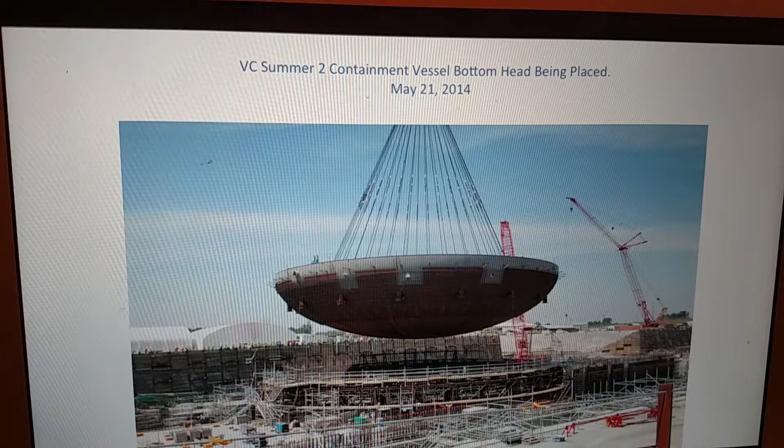Growth is occurring in the nuclear industry in the United States. 20 miles northwest of Columbia in Jenkinsville, South Carolina, the South Carolina Electric and Gas Corporation has begun construction on two AP1000 plants at the V.C. Summer site. South Carolina Electric and Gas applied for the combined operating construction license in March of 2008 and was granted approval in March of 2012. Construction began on Unit 2 with the first concrete pour in March of 2013. This was the first construction on a nuclear power plant in the United States in 30 years.

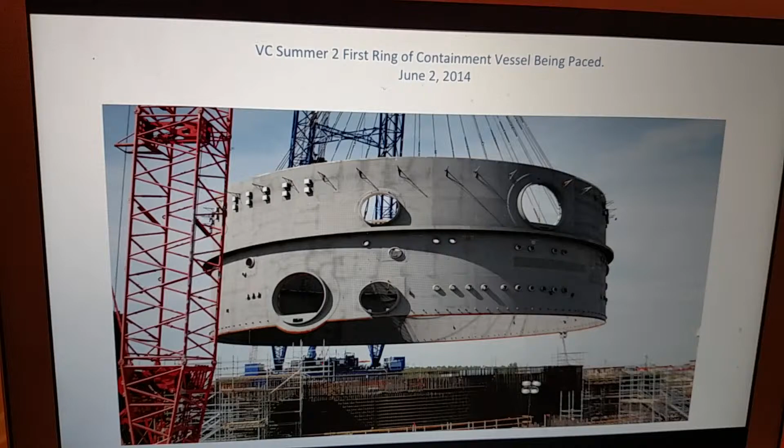In October of 2014, the project suffered a significant setback due to fabrication delays based mostly on the modular design of the reactor building itself. Construction is progressing, with Unit 2 expected to complete in late 2018 or early 2019, and Unit 3 expected to complete approximately a year later.

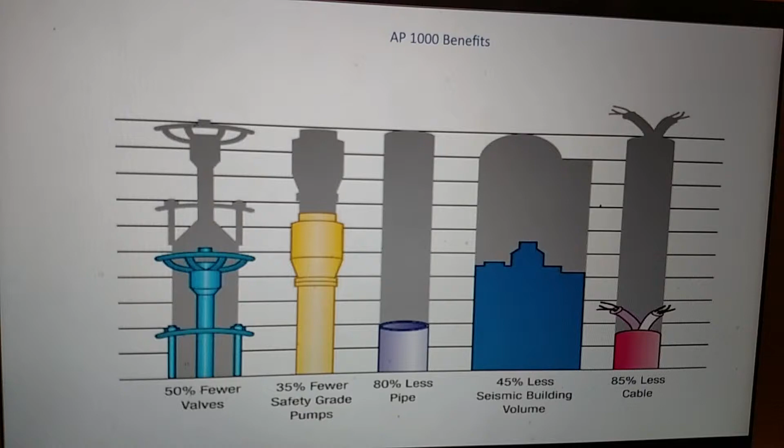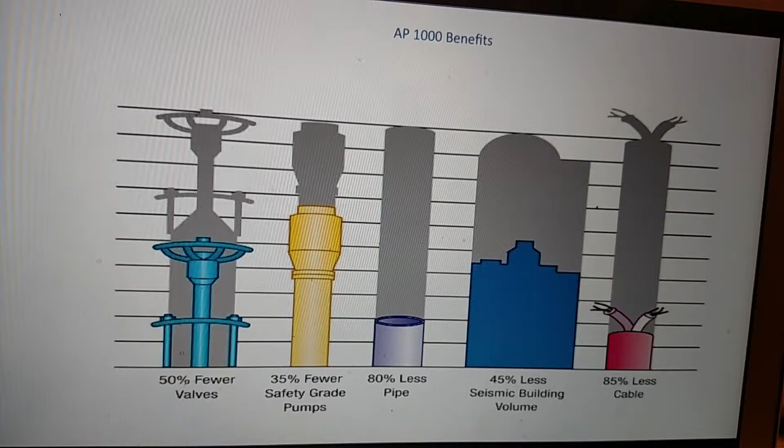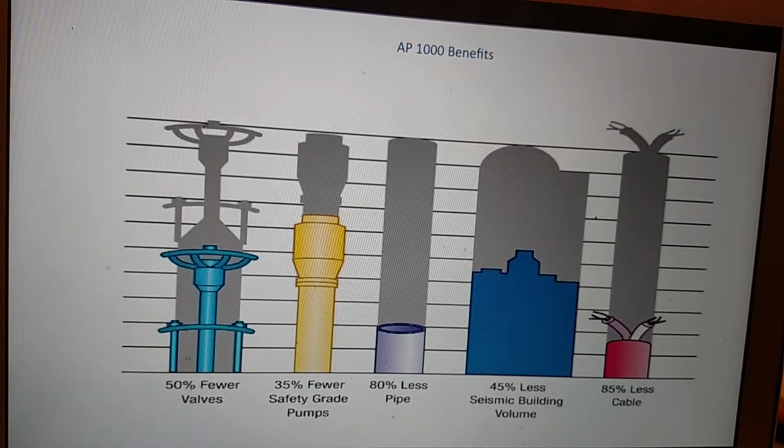These AP1000 plants are approximately 1,100 megawatt units, and the AP1000 design was chosen because it has fewer moving parts, it has safety systems that rely on gravity instead of power supplies and motor-driven components, and it has a 60-year design life. These plants have 85% less cable, 80% less piping, 50% fewer valves, and 35% fewer pumps than the average existing nuclear plant. They also require about 45% fewer seismic 1 rated buildings.

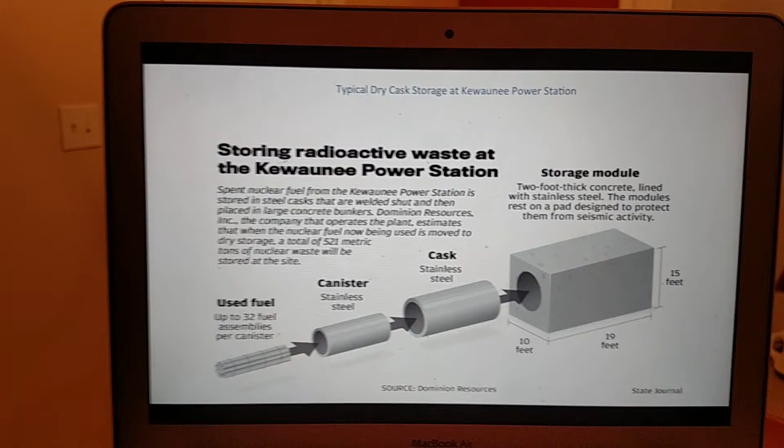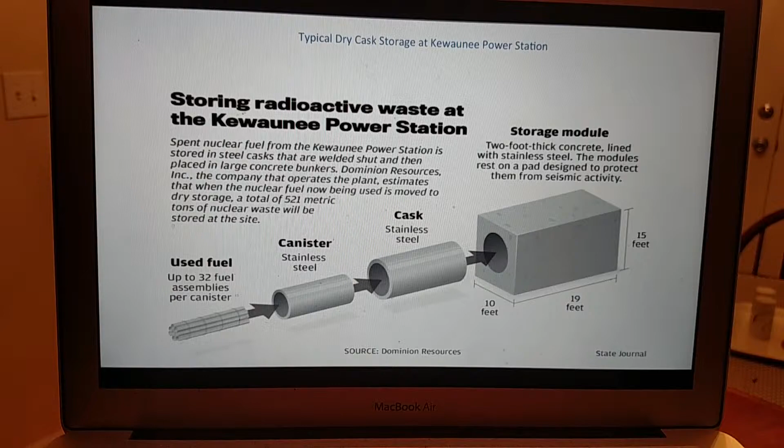We have also been experiencing a loss of megawatt generation in the United States. Perhaps the most notable is the Kewaunee Power Station closing. Kewaunee was located in Carlton, Wisconsin, which is about 27 miles southeast of Green Bay. What makes the Kewaunee closing significant is at the time of its closing, Kewaunee was a top performing plant. In fact, in 2010, Kewaunee won the American Nuclear Society Utility Achievement Award for outstanding performance in plant operations and received an INPO 1 that same year.

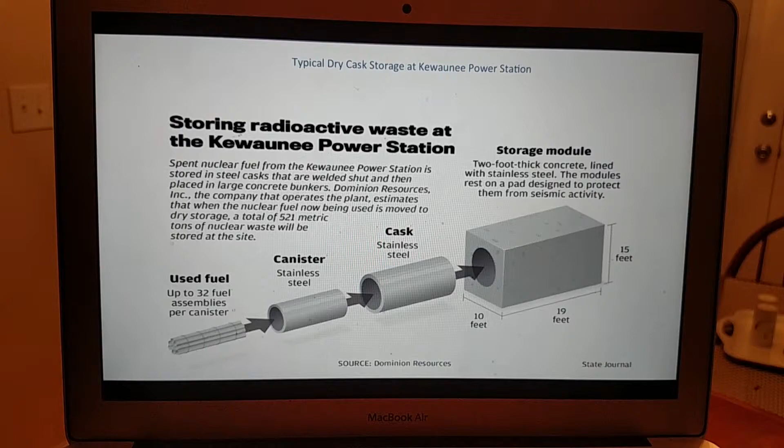Dominion purchased Kewaunee in 2005 with the intention of it being the first step of them establishing a nuclear fleet in the Midwest. They purchased it from Wisconsin Public Service and from Alliant Energy. In 2008, with the onset of the recession and with increased shale production in the United States, natural gas prices began to drop. Kewaunee was operating in an open market environment and simply wasn't able to compete with the natural gas prices.

In 2012, when the contracts of the previous owners, Wisconsin Public Service and Alliant Energy, to buy energy from Kewaunee expired, they elected not to re-up their contract. This was pretty much the nail in the coffin for the Kewaunee station. And in October of 2012, Dominion announced that they would be closing the plant. Kewaunee came offline permanently in May of 2013.

Currently, Kewaunee is scheduled to have all of their fuel loaded into dry cask storage by the end of 2016. At that time, they will enter what is called a SAFSTOR program, where they will be monitored for up to 60 years. That will allow some time for radioactive decay, so that when the final decontamination occurs, there will be less radioactive waste to dispose of. Currently, Kewaunee is scheduled for final decommissioning and dismantlement in 2069, with the site being available for unrestricted use in 2073.

On March 11, 2011, a 9.0 earthquake off the coast of Japan triggered a massive and very destructive tsunami. This tragedy accumulated 15,891 confirmed deaths, with 2,500 people still missing. 4 years later, an estimated 230,000 people are still living in temporary housing due to their homes being destroyed or the areas they lived in being uninhabitable. The impacts of this event are far-reaching, but the impact we want to discuss today is how it affected our nuclear renaissance.

The nuclear plant at Fukushima Daiichi houses 6 boiling water reactors. At the time of the event, Unit 4 was defueled. Unit 5 and Unit 6 were both in cold shutdown for planned maintenance. Units 1, 2, and 3 were operating normally. Following the earthquake, plants 1, 2, and 3 shut down automatically as designed. The emergency generators started automatically as designed, and the plant was safe and stable.

The destruction really started 50 minutes later when the tsunami arrived. The wave that hit the plant was estimated at 46 feet tall. The seawall around Fukushima Daiichi was approximately 33 feet tall. When the tsunami breached the seawall, flooding occurred at the Fukushima Daiichi plant, which flooded the emergency diesel generators and resulted in a complete loss of power. With no power available, cooling was not able to be restored to the reactors, and temperatures began to increase to the point of meltdown. At the excessive temperatures, a zirconium-water reaction occurred, creating massive amounts of hydrogen buildup, and explosions resulted at units 1, 2, and 3.

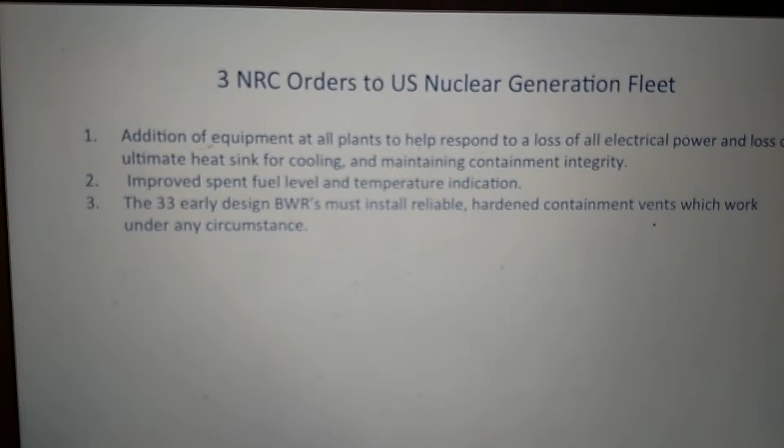And the third order deals specifically with the 33 operating boiling water reactors in the United States, requiring them to install reliable, hardened containment vents which would operate under any circumstance.

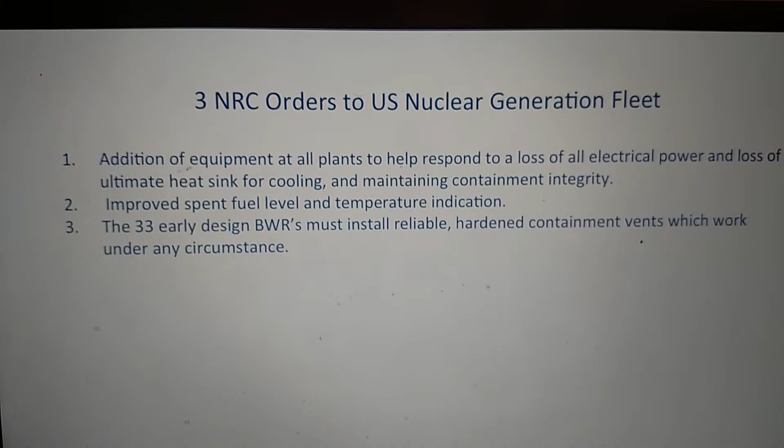For the existing plants, a plant survey was conducted in 2013 of all the utilities in the United States that are currently operating nuclear power plants. This survey estimated that over the next 3 to 5 years, to bring all 102 operating plants up to the regulations the NRC put out, it's going to cost approximately $3.6 billion.

The impact on the new plants that are being constructed has been very minimal, largely due to the fact that their safety systems are passive, meaning that they don't require electricity or motor-driven pumps to initiate the safety systems. They're all gravity fed.

For Watts Bar 2, who already has their construction license but not an operating license, they have to be in compliance before the NRC will issue them their operating license. For the other 4 plants, the 2 at VC Summer and the 2 at Vogtle, who already have a construction and operating license, they have to be in compliance prior to their initial fuel load.

There are other types of reactor designs that are being researched for possible development in the United States. One of these designs is the Advanced Boiling Water Reactor. In 1997, the NRC approved the GE Nuclear Energy single-cycle, forced-circulation Advanced Boiling Water Reactor design.